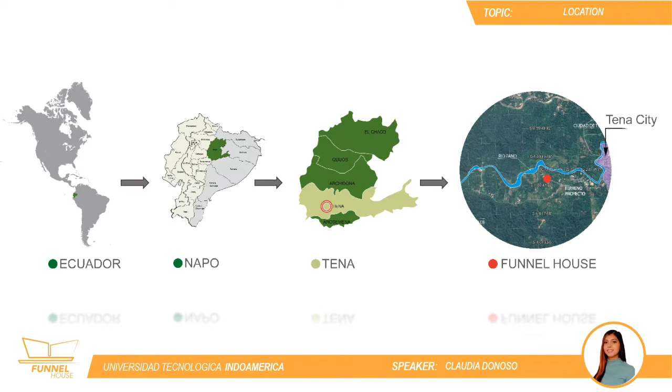Funnel House is located in Ecuador, in the Amazon region, Napo Province, Tena Canton, Pano Parish. The lot is located 4 kilometers away from Pano Town and 4 kilometers away from Tena City, right in the middle of both. This project enjoys a privileged location, surrounded by one of the richest ecosystems on our planet, the Amazon rainforest.

The importance of this ecosystem has led us to think more closely about the environmental impact that the construction industry can have. The borders of the Amazon are inhabited, with growing cities in the middle of nature. It is very important for our future to establish a sustainable relationship with the urbanized regions of the Amazon, to guarantee the protection of its natural regions.

Tena Canton is made up of one urban parish, also called Tena, and 6 rural parishes. Our project is located in Pano, rural parish. Tena Canton has approximately 60,880 inhabitants and a population density of 234 inhabitants per square mile.

and a surface of 1,507 square miles. Population settlements are scattered and small, settled mainly along the banks of the Napo River and on the outskirts of the urban parish of Tena. Its economic structure is based on agriculture. In the image, we can appreciate the city of Tena, crossed by the Napo River.

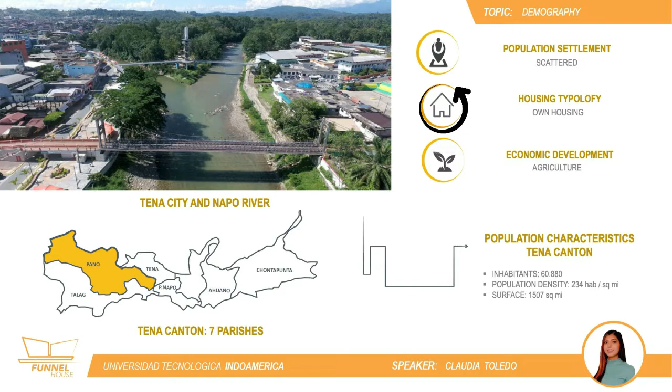The population in Pano is mostly young. Around 80% of the people are between 15 and 45 years old, being an important potential client for housing. The families are patrilocal, meaning that the wife moves into the husband's parents' house and is considered a part of that family. For this reason, our project has a progressive growth potential.

More than half of the families in the sector own a house, for 3 to 4 dwellers, which represents a significant market potential for our design and an important chance for its replicability.

The following image shows an average house in Pano. 81% of the roofs are made of zinc plates, and 78% of the constructions are made of wood. The cost of this 1,200 square feet house ranges its price from $36,000 to $48,000. We should consider that this type of house does not meet the environmental quality and comfort standards.

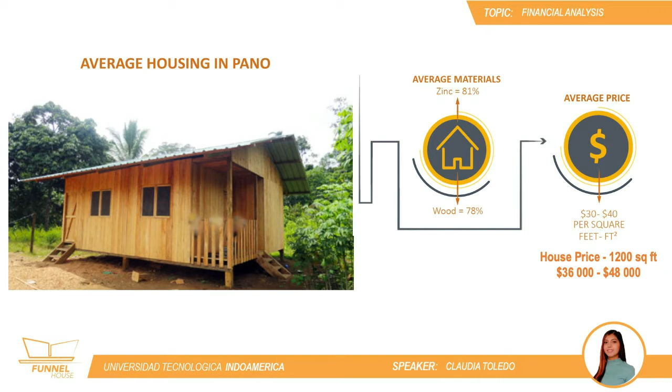Our team carried out 80 surveys with potential clients in the project's area. It was determined that the majority of the potential clients, 65%, are willing to pay between $70,000 and $110,000 for a 1,689 square feet house, the size of our project.

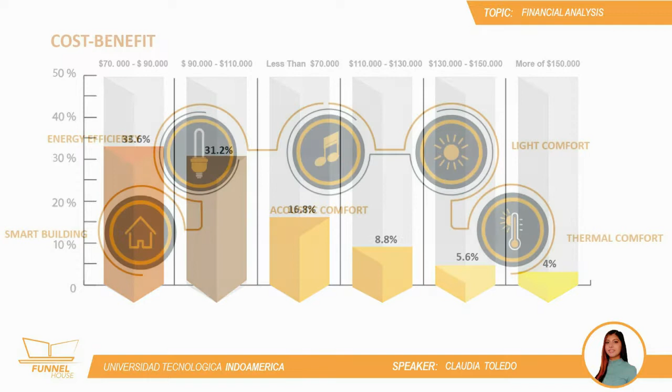After the analysis, it was concluded that an average dwelling in Pano does not meet the needs and characteristics of its clients. Also, our potential clients are willing to pay more for a house with better conditions.

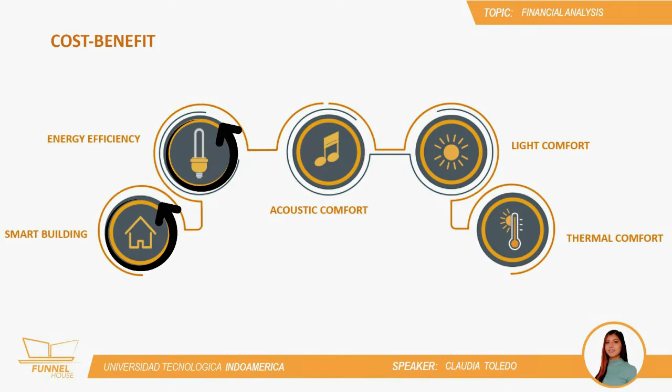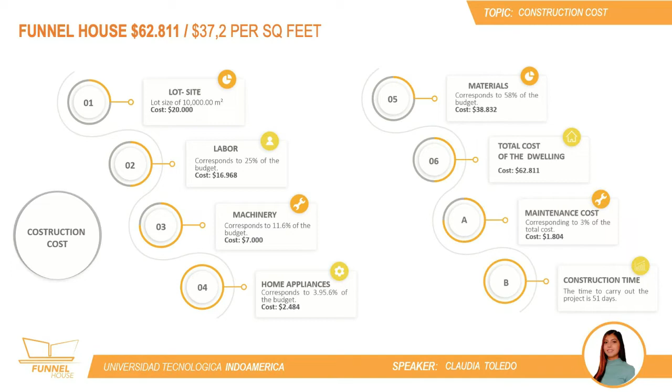A detailed budget calculation of our project was performed, establishing a final cost of $62,811, $37.2 per square feet. This includes lot, labor, construction, machinery, appliances, and material costs, shown in the points 1 to 6.

The design process included 4 phases. First, the environmental and user conditions were analyzed. In the second phase, passive strategies such as morphology and orientation were optimized to achieve the desired comfort. The third phase included technologies analysis and implementation to improve environmental quality and comfort. Finally, a coherent architectural expressiveness was defined, mixing vernacular and contemporary architecture.

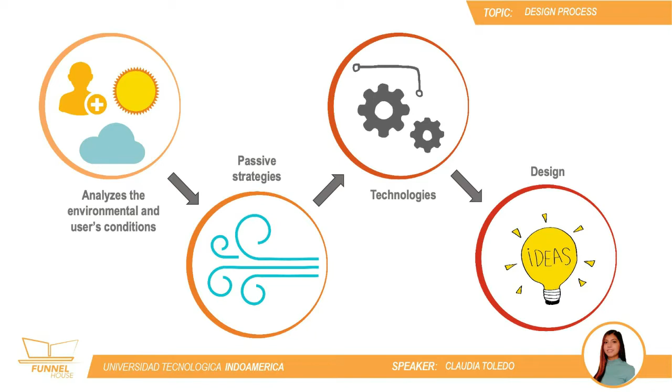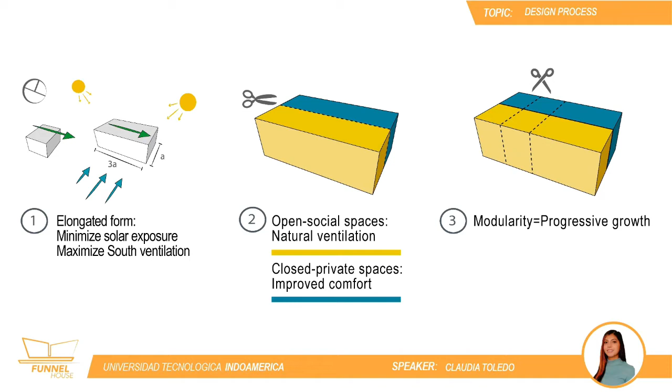The conclusion was that the building needs to be cooled down and the relative humidity needs to be lowered. Funnel House has an elongated form to reduce solar exposure from east and west. Its form also optimizes the capture of the south prevailing winds to maximize natural ventilation. The architecture program was divided into open spaces with permanent natural ventilation and closed private spaces with mechanically improved comfort. The project was modulated to allow progressive growth.

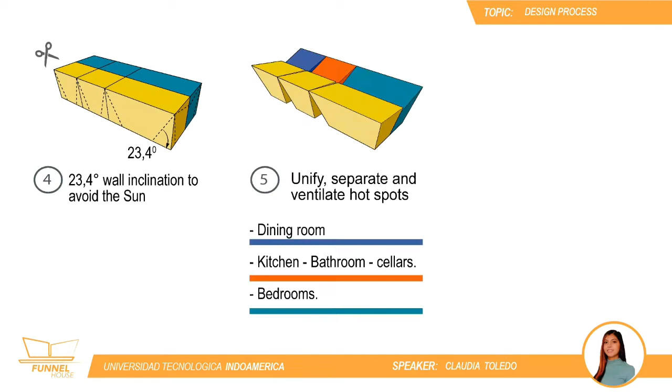In Ecuador, the sun reaches an inclination of 23.4 degrees during the solstices. The north and south walls were tilted at this angle to avoid sun incidence and decrease thermal gains. The other walls were also tilted to avoid the sun from east and west. The hotspots like kitchen, shower, and machinery room were unified into one module, separated from the others, to be ventilated and avoid heat transfer. Finally, the building was raised from the ground to allow circulation under it, avoid possible floods, and prevent the entry of wild animals.

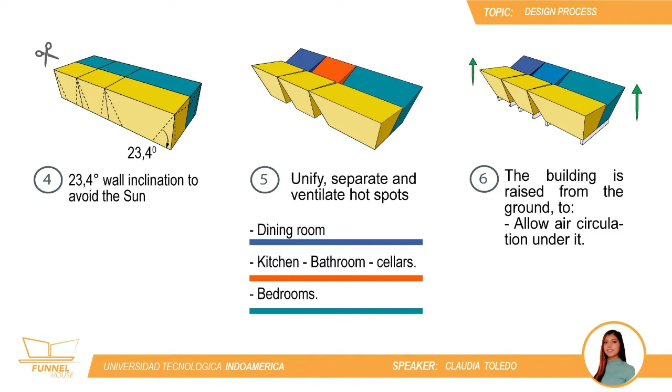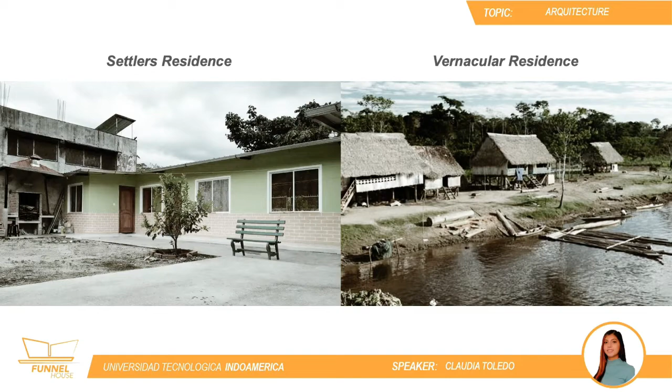The original vernacular architecture of the Ecuadorian Amazon region is being left behind due to immigration from the Ecuadorian Andes cities that brings different construction techniques which do not respond to its environment. Funnel House deeply analyzes the knowledge of vernacular architecture accumulated for generations, mixing it with modern techniques, technology, and contemporary architecture. The local vernacular architecture divides the house into two main parts: the ekent, or private area in the native Shuar language, and the tankamash, or public social area, separated by the taned, or bunk beds.

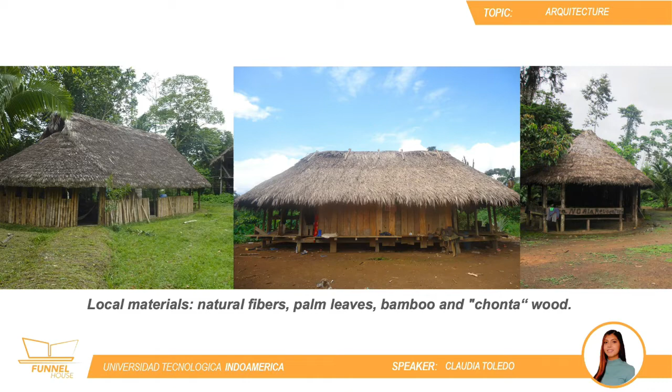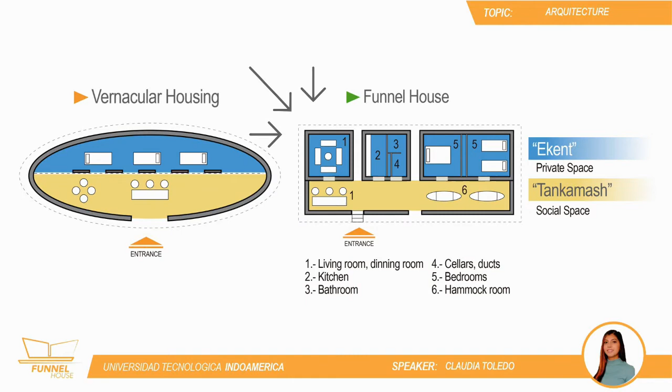It can be seen in the left diagram. Vernacular houses are built with local materials, such as natural fibers, palm leaves, bamboo, and chonta wood. The wall layers are placed vertically outwards and horizontally inwards, separated from each other to allow natural ventilation. Our project takes this idea of distribution and reinterprets it, as can be seen in the diagram on the right. In this way, its functionality adapts to the customs of the inhabitants of this region.

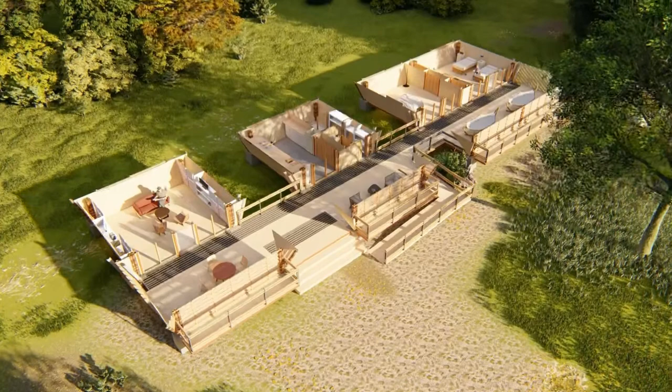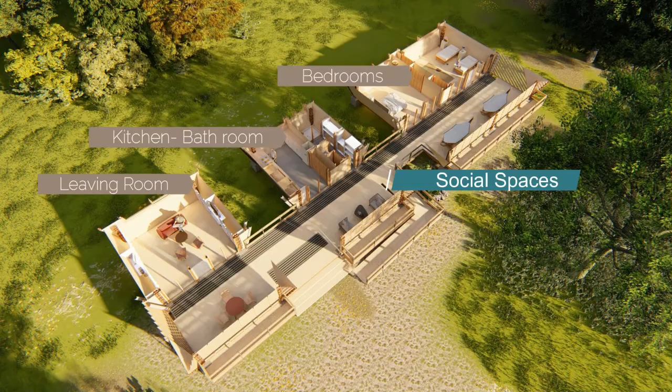Funnel House reinterprets the strategies developed by vernacular architecture. The house is divided into three modules, connected by a semi-open hall that includes circulation and social spaces. This hall also interacts with the gardens that help regulate temperature and bring nature closer.

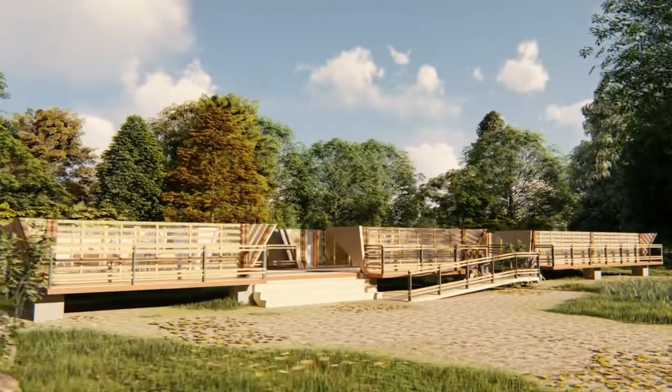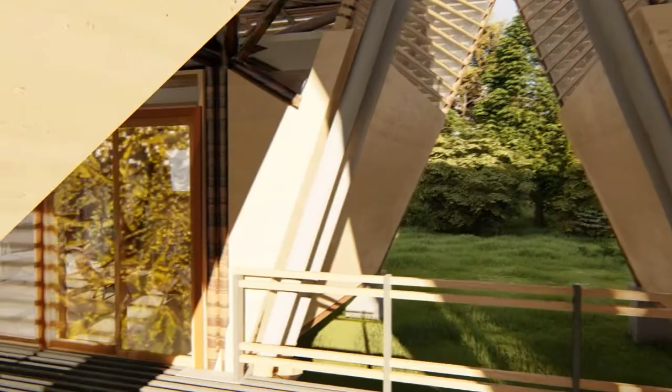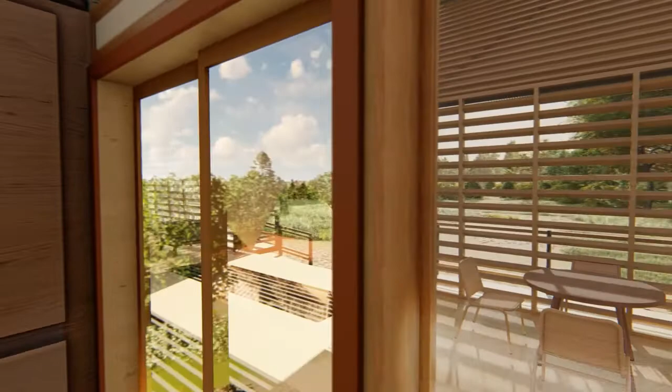The first module includes the living and dining room, located in two separate spaces that can be arranged into one to host social events.

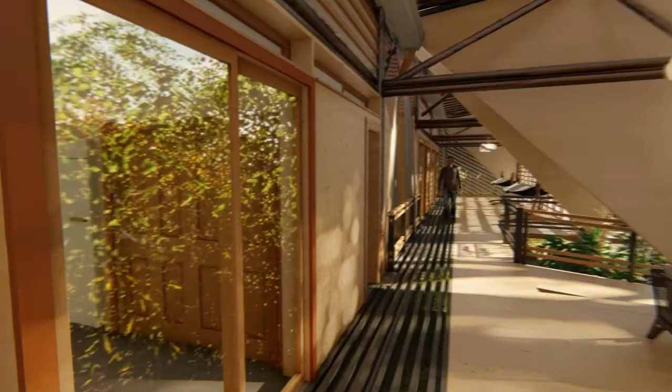In the second module, we find the kitchen, bathroom, and machinery room. Finally, bedrooms are located in the third module, each one equipped with built-in wardrobes and storage, and hammocks in the semi-open hall. The design, ergonomics, and accessibility meet local and international standards, providing an excellent occupant's experience and comfort.

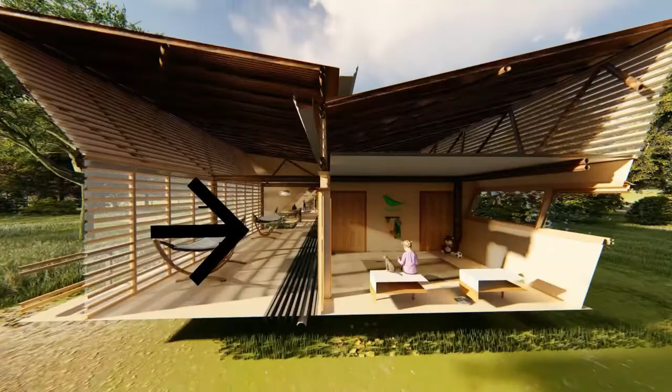Each module comprises two areas: a public area in the semi-open hall and private closed areas, isolated with several control layers to guarantee comfort. The walls are inclined to avoid solar radiation, which also helps to accommodate the storage spaces.

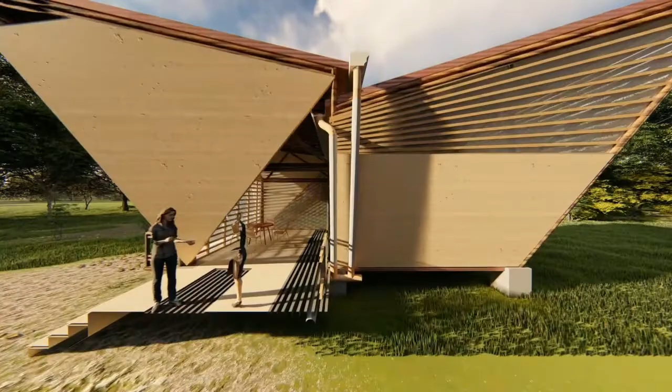Funnel House offers the highest life quality for its occupants. We used the International Well Building Institute certification as a guide, analyzing 10 parameters. These parameters will be explained in the following sections.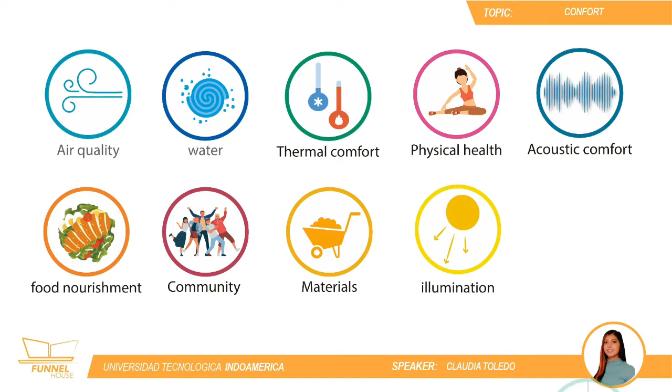In order to reduce the energy consumption of the house, the project implements several passive strategies to maximize cooling. First, the building is lifted from the ground to allow air circulation under the floor, cooling it down in the shadow.

Second, the air carried by prevailing south winds is cooled down as it passes through vegetation. Third, different vertical distances at the entrance and exits of air accelerate its circulation, improving natural ventilation. Fourth, rain protection was carefully designed, allowing also rainwater collection in an underground tank for reuse.

Fifth, the maximum sun inclination was used to calculate the inclination of the walls and the roof's eaves to prevent thermal gains due to solar radiation. Sixth, cold air regulators on the ground floor allowed the entry of cool air circulating under the building. Seventh, native trees surround the building to increase shading and air cooling.

Eighth, the windows are designed to allow natural ventilation. They include anti-bug nets.

A mechanical ventilation system is implemented to reach the goal of thermal comfort. Due to the high relative humidity of Pano Parish, the mechanical system allows ventilation with variable flows depending on the humidity rate. This guarantees an appropriate quality of the internal air.

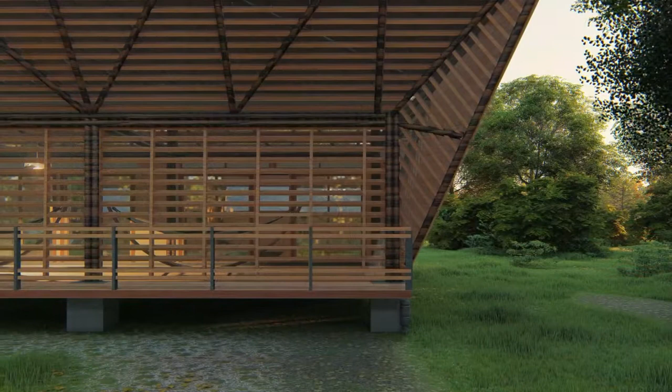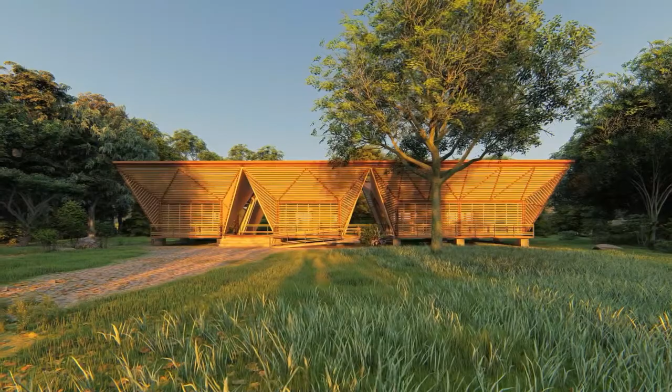The main challenge regarding thermal comfort for this project was the high temperatures and high relative humidity of Pano Parish. This solar analysis was very important to reduce its incidence on walls and indoor spaces. The wall inclination and roof eaves provide solar protection through the year to reduce thermal gains.

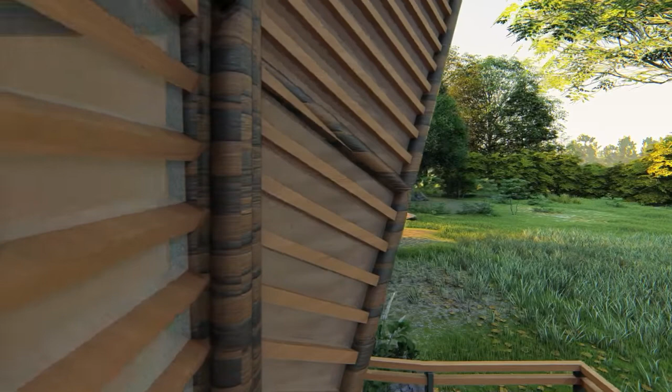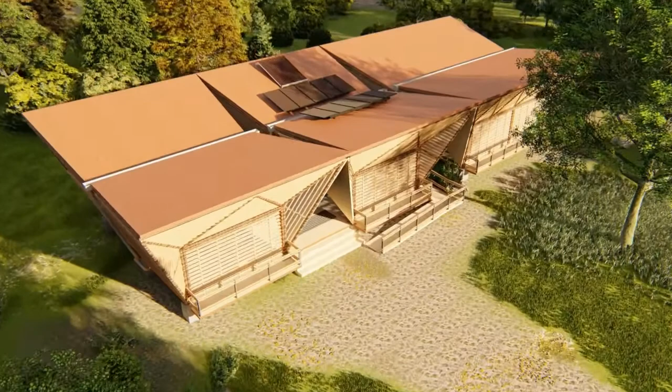Funnel House generates more energy than it consumes. Ecuador has a very constant solar irradiation throughout the year due to its location on the planet, with similar solar inclinations to the north and south.

This house uses only electric energy, generated by 10 photovoltaic panels that produce 5,807 kilowatts per year. Its energy consumption is 4,338 kilowatts per year.

This results in an energy surplus of 1,469 kilowatts per year, which is returned to the grid to compensate for the energy consumed during the night. J3M Company was a key partner in designing this real market system.

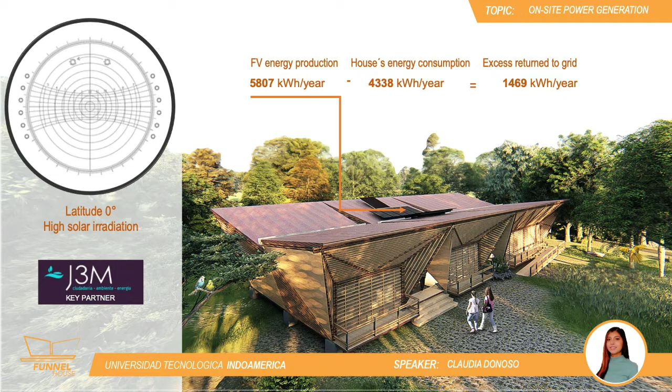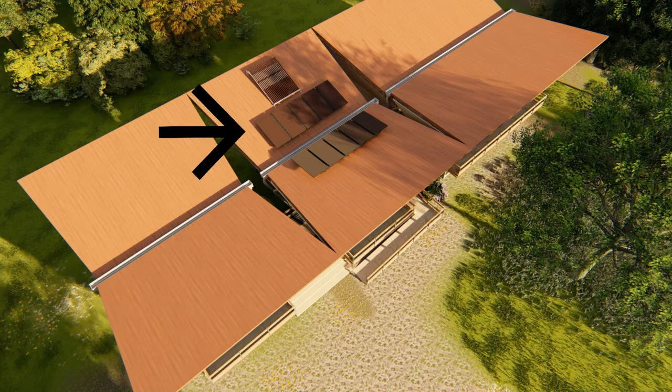The panels are equally distributed on the two roofs over the central module, with seamless integration. The panels have an ideal 20% inclination to maximize energy production, which also allows self-cleaning by the rain.

The highest consumption is made by the hot water system. The desired thermal comfort inside the dwelling was defined to meet ASHRAE Standard 55.

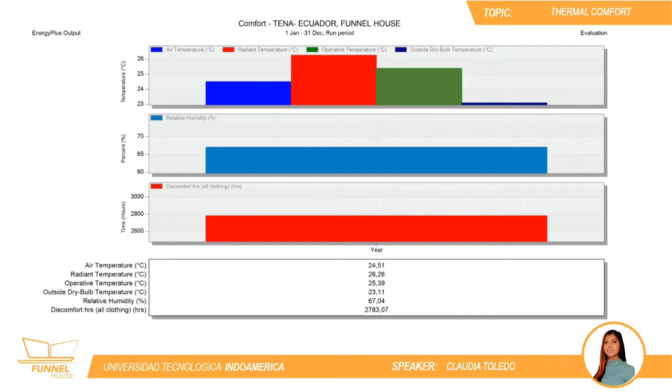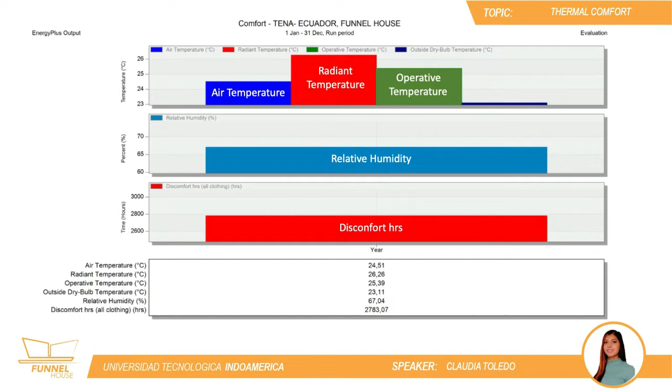In this simulation, it can be seen that an optimal operating temperature of 77.7 Fahrenheit degrees is maintained inside the home, with a relative humidity of 67.04%.

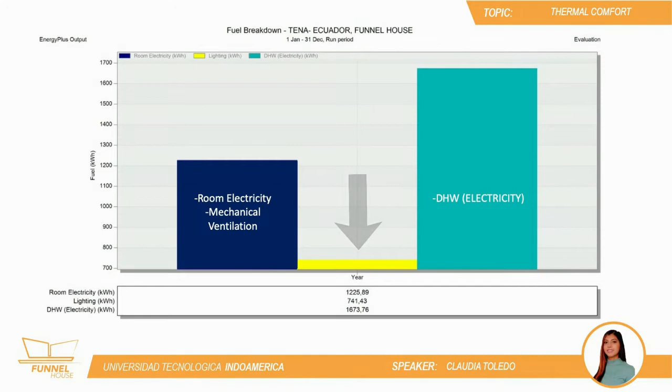Even though artificial illumination represented a very low energy consumption compared to the other systems, it was also studied to provide natural illumination for all the spaces during the day, meeting the optimal values demanded by local standards as seen in the right chart.

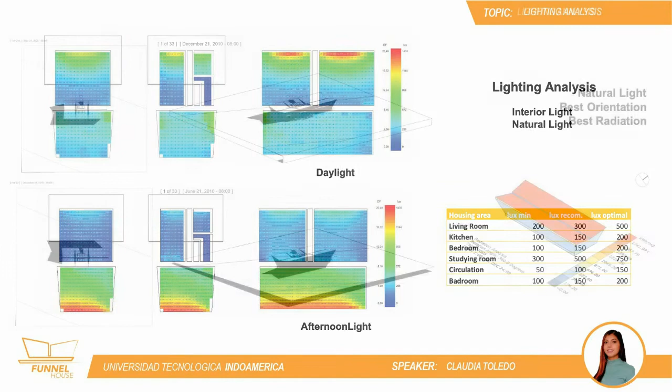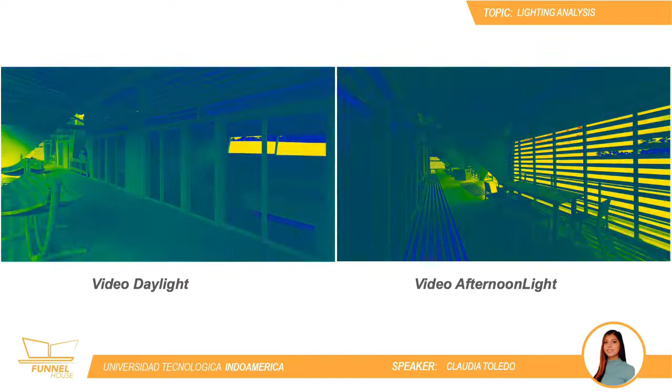The house allows indirect daylight to enter spaces through windows and blinds. The semi-open hall is illuminated and protected from radiation using blinds placed at 30 degrees, which provide natural light and ventilation while avoiding solar radiation and rain.

Pano Parish is exposed to different risks produced by nature and human activities. Resilience strategies were implemented to address each potential risk. The structural design is flexible and resistant towards earthquakes.

In case of isolation due to pandemics, social disturbances, or others, the social spaces allow different uses, and the gardens include food production and rainwater reuse.

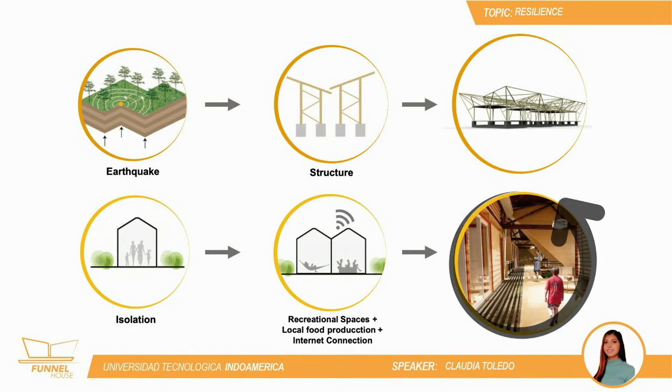The house rises 3 feet above ground level to prevent damage in case of flooding, and the lot is located away from the Pano River flooding zone.

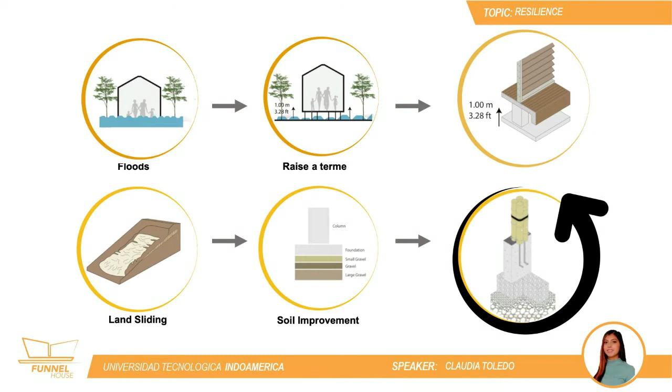The roof system allows water to be evacuated effectively in response to heavy rains. The house is built over improved soil and has a continuous reinforced concrete foundation that gives stability to the land and the house.

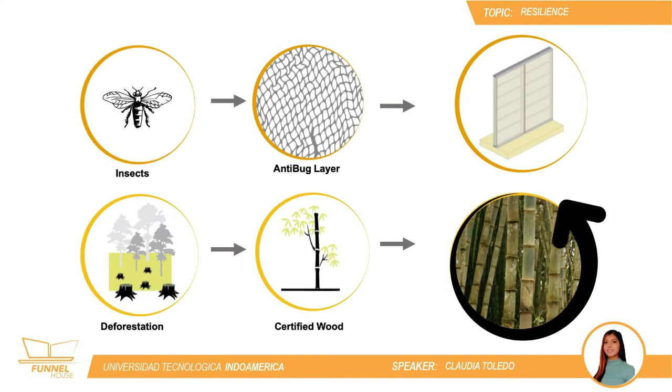The presence of insects, amphibians, and small reptiles is very common in the Amazon settlements. The rise of the building above ground level and the use of anti-bug layers keep these unwanted guests away. Deforestation is avoided by using certified construction woods, obtained from environmentally responsible cultivations.

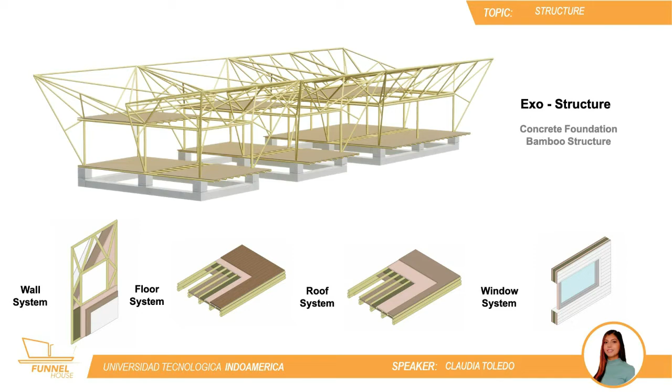Funnel House effectively integrates high-performance engineering systems and building science practices to achieve efficiency. The house has a continuous concrete foundation with steel reinforcements. The building implements a bamboo exostructure that supports the roof and the interior spaces.

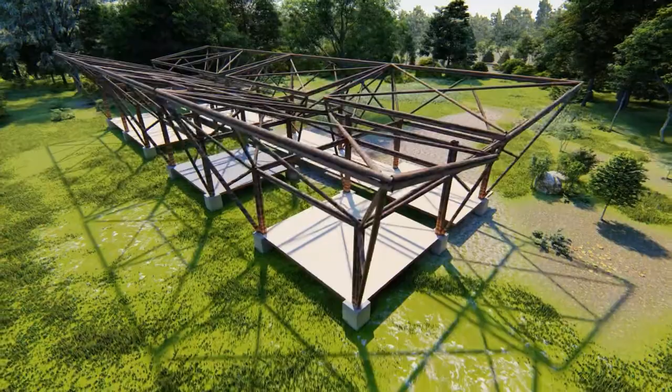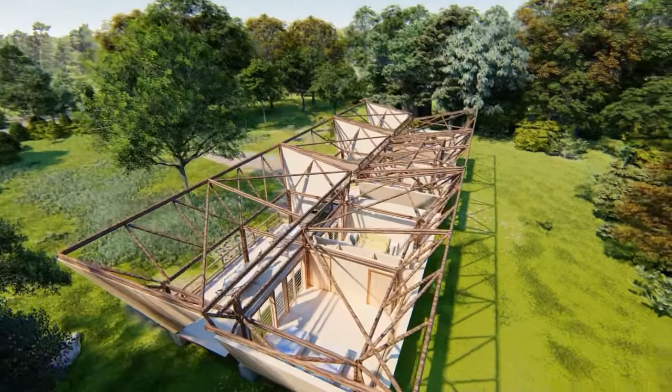Secondary structures form the walls, floor, and ceiling. Windows have their own system to be hermetic. Bamboo, or Guadua angustifolia, has its own construction regulation in Ecuador, which explains the extraction process, treatment, and detailed construction techniques.

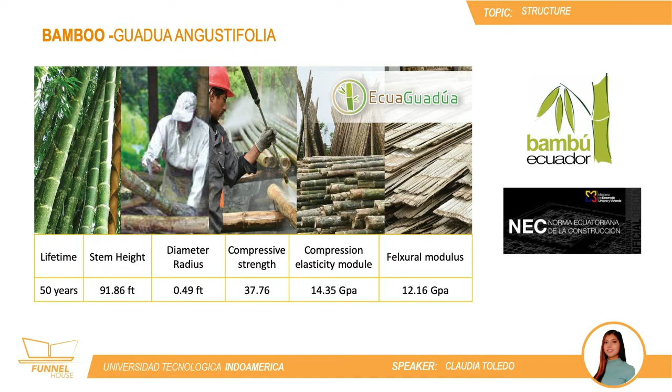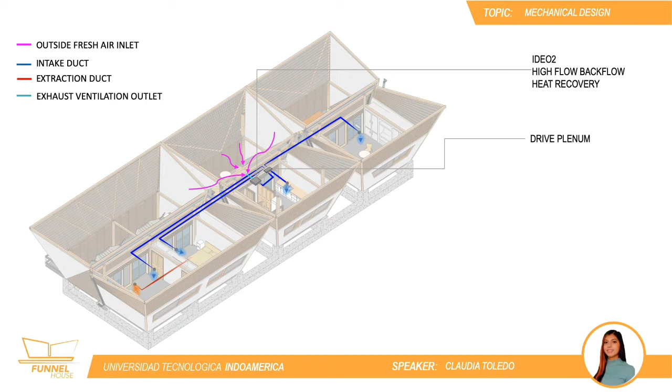The private closed spaces use an HVAC system, implemented to reduce relative humidity and ensure internal comfort, with lower energy consumption compared to the common systems used in this region.

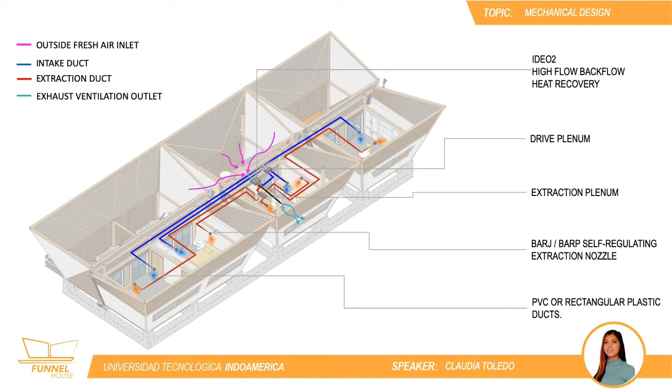A dual-flow controlled mechanical ventilation system is used. It is made up of two subsystems: the drive system and the extraction system.

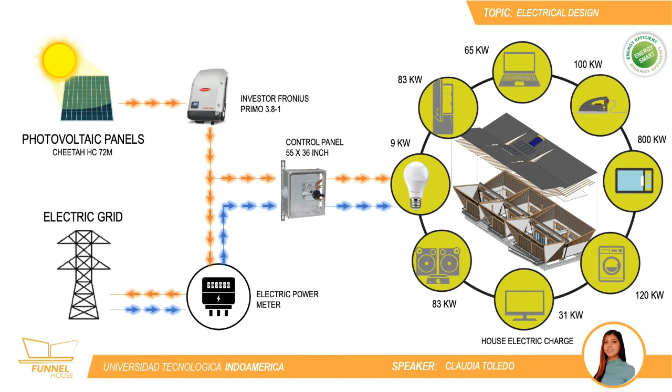The house uses 10 photovoltaic panels located on the roof, connected to an inverter and control board, powering the house for appliances, illumination, and ventilation equipment. The appliances and equipment were carefully selected to be energy efficient and available in the local market.

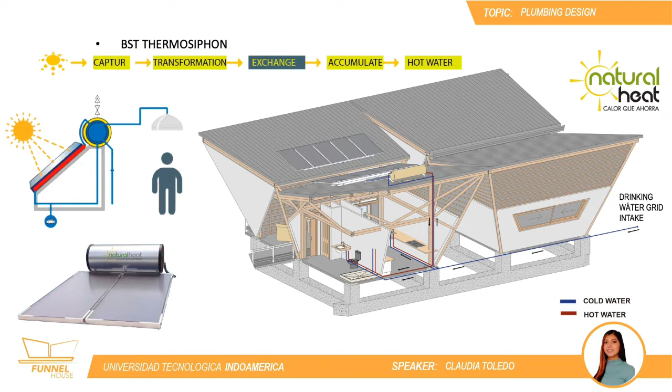The sanitary hot water is produced by a thermosiphon system with a 4-step operation. The collectors catch solar radiation. Then the solar radiation is transformed into useful heat, which is used to heat a fluid. Finally, the fluid heats the water contained in the accumulation tank.

A thoughtful water system provides autonomy and allows water reuse. The local drinking water grid supplies the house and fills the reserve tank for 5 to 7 days in case of an outage. Rainwater and grey waters are recovered, treated and reused in the toilet and for garden irrigation.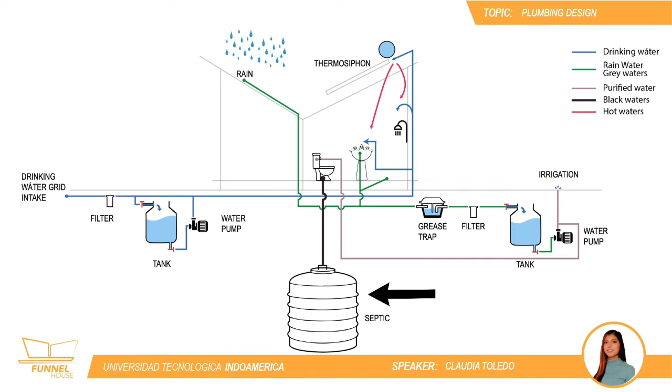The black waters are treated using a biodigester septic tank. The house has different control layers of protection, complying with the building science fundamentals.

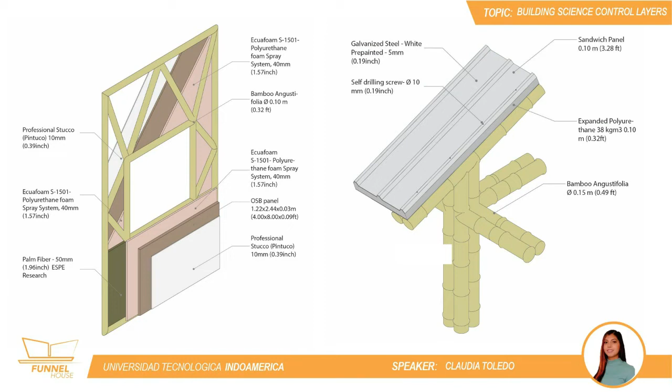Walls, floors, and ceilings include a vapor-resistant layer made of polyurethane foam applied to OSB panels. Walls and floors are filled with palm fiber for thermal and acoustic insulation. The roof is made of a galvanized sandwich panel with polyurethane filling that provides thermal and acoustic insulation.

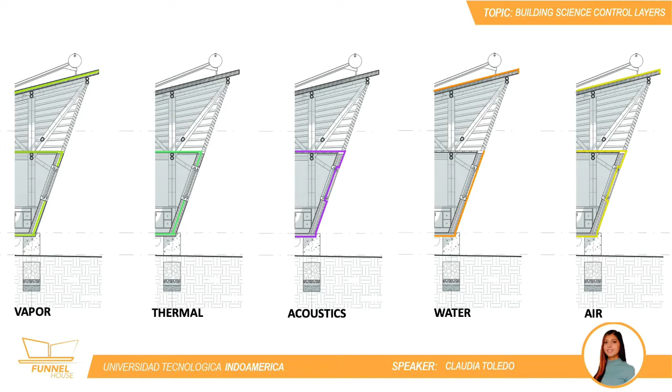The wall's inclination prevents water filtrations. They finish with 2 layers of water-resistant stucco, white-colored on the outside to reduce thermal gains. The spaces and windows are closed hermetically to prevent air leaks.

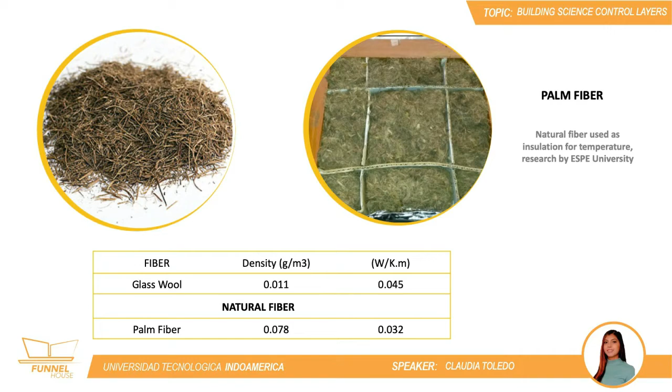As you can see, the house is built with Ecuadorian materials and labor. The natural palm fiber used as insulation proved to have better insulation conditions than synthetic materials such as fiberglass or fiber rock. Funnel House ensures efficiency in maintenance, reducing costs, time, resources, and environmental impact.

The proper materials treatment prolongs their lifetime. It uses materials available on site, adapted to local environmental conditions and local labor know-how, which reduces costs. The house also includes smart building features that allow automated monitoring. To prevent possible damages, the owner will also get a user manual for the house.

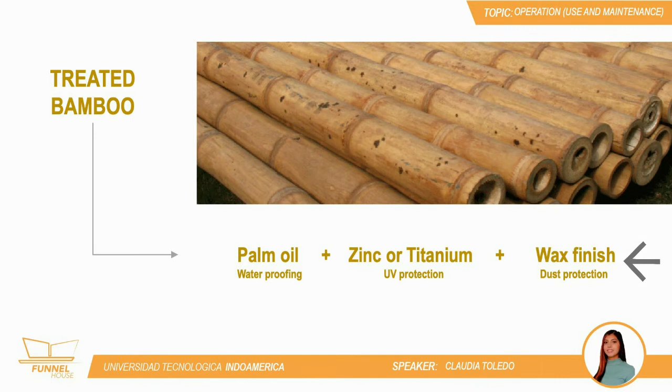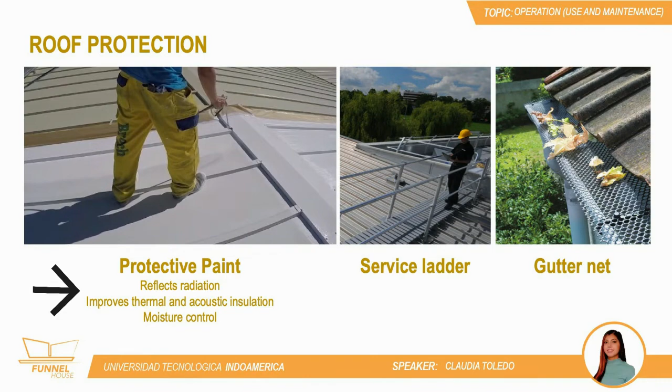Palm oil is a natural waterproofing used for bamboo pieces. It is available locally and excessive amounts are not required. To extend the lifetime of the OSB panels in the walls, a water-resistant stucco coating is applied. A reflective paint coating is applied on the roof, reflecting radiation, improving thermal and acoustic properties, and controlling humidity.

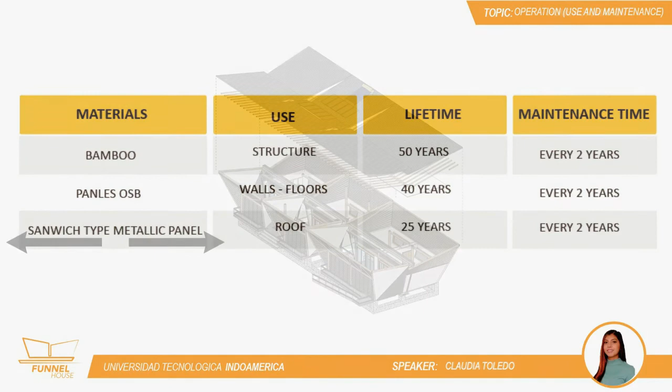The chart resumes the lifetime and optimal maintenance time of the main materials. All the advantages of Funnel House are monitored by a smart building system to maintain optimal performance. The smart devices can be controlled with a smartphone and keep track of consumption data for optimization.

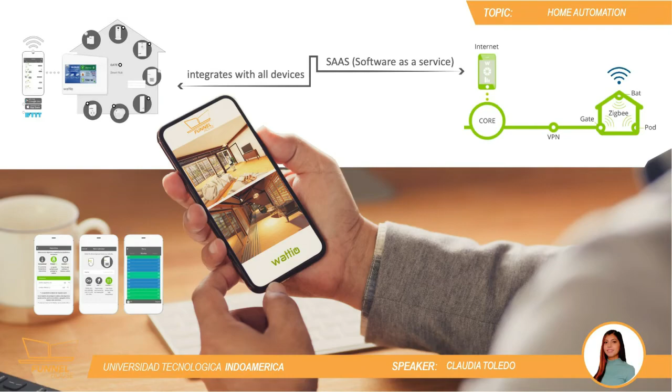Doors and windows can also be monitored to prevent air leaks. This system alerts neighbors or family members in an emergency.

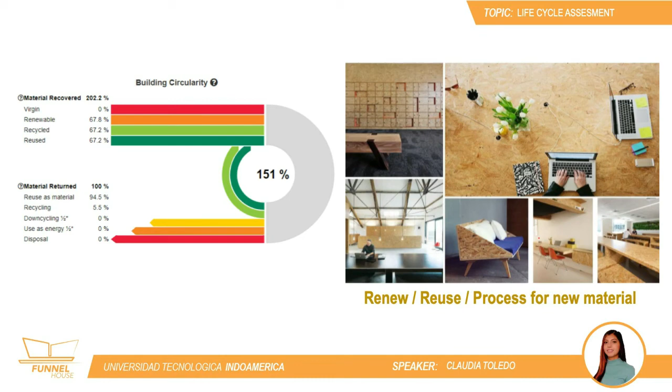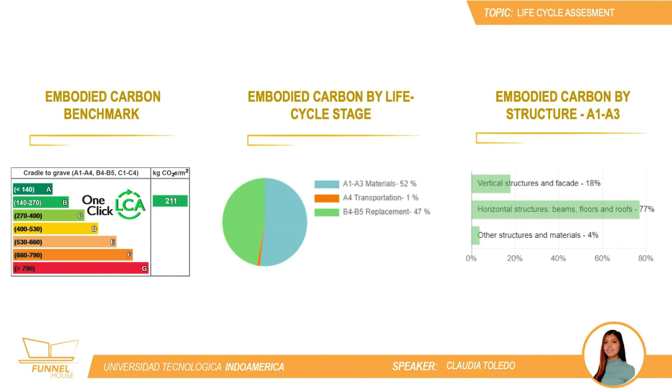Funnel House conception included its life cycle analysis to minimize environmental impact. Circularity and the value chain were determined, resulting in a material recovery of 151%. Bamboo has a great potential of recovery since it can be renewed, reused, or processed to produce other materials. Deconstruction or selective demolition of the structure is also possible, ensuring maximum recovery of all materials and components. The design was capable of reducing embodied carbon to a minimum, concentrated in structural materials and replacement, achieving a B score.

Solar Decathlon meant for us an amazing personal and professional growing experience. We are very thankful for being part of it. It was our pleasure to share with you.

This design journey leads to the creation of Funnel House, a plus energy dwelling designed to satisfy its users' desire for comfort and modern quality life, respecting local knowledge, traditional lifestyle, and helping to protect the Amazon rainforest.